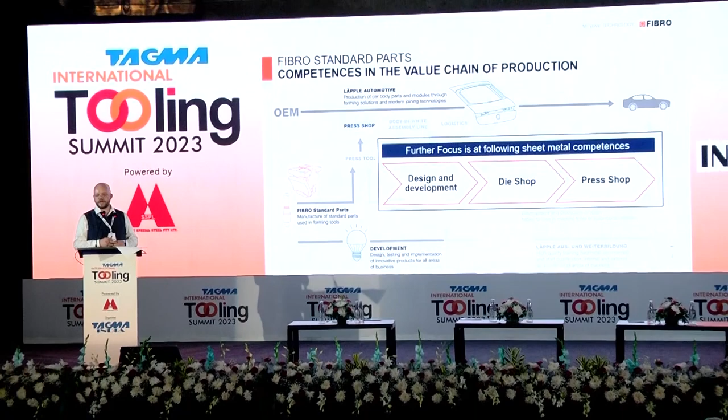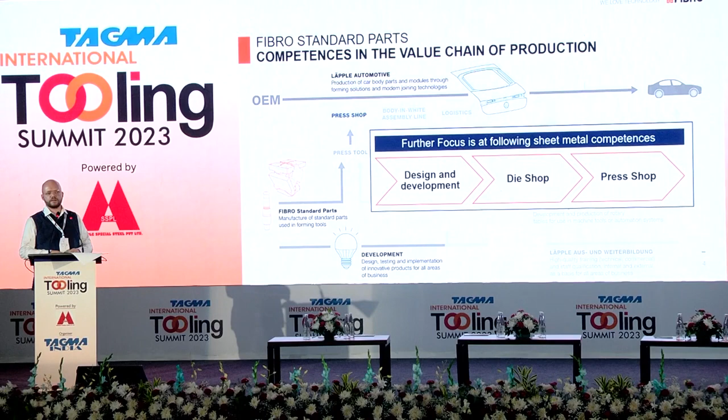So, let's start. In the next minutes we will focus on these 3 steps: design and development, die shop, and press shop. We will take a look how the development in our group, combined with the standard parts division, can support the tool and die shop, furthermore the press shop, and then support to get your return on invest on maximum strokes per minute and maximum production running time.

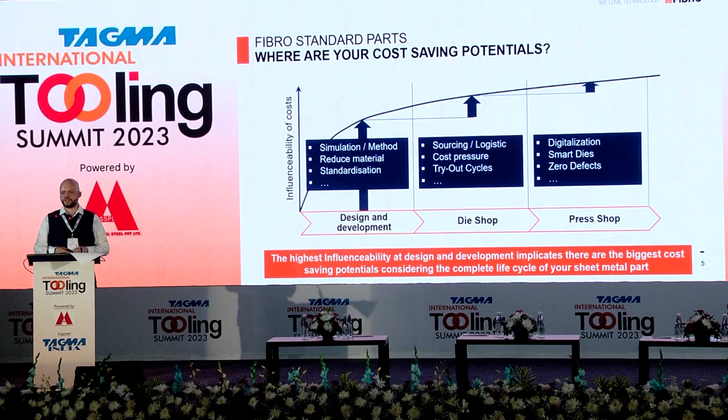At the beginning, I told something about efficiency. So what is efficiency? Efficiency is the ratio between the effort you put in, so the costs, to the outcome. And with this value, we measure how economic a situation is. On this slide, we see at which process step we have the most influenceability in regards of the costs. And it is, as it always was, during design and development phase.

With the arrows going from the bottom to the top, the length of the arrow symbolizes the influenceability of the cost. So you see in the press shop, where actually you have to return your invest from all the steps before, you have very small influenceability of the costs. Everything has to run as it was planned before, otherwise you're losing money. Later on, I will show you some small little helpers, some hidden champions in regards how you can improve zero defect production in your press shop.

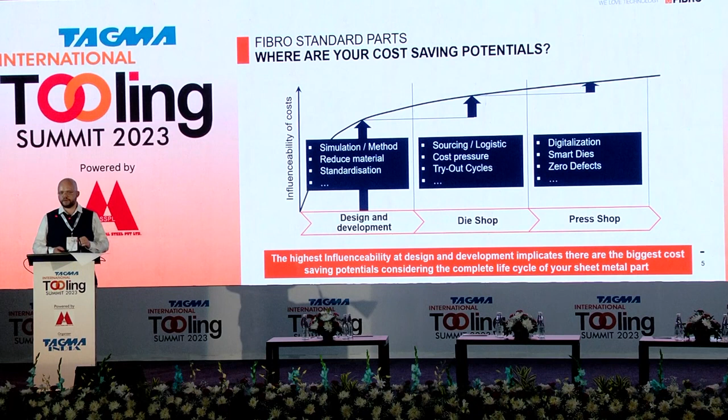But first things first, now I would like to show you from the beginning how with simulation or method, state-of-the-art issues, you can influence your value stream, your production. I have a big example where I would like to tell you a personal story and afterwards something about reducing material.

So I went to China for the company in 2018. And during that time, we had several challenges also due to COVID virus. In the middle of 2020, I was coming back from China, and I was exhausted. Everything was very unplannable. Supply chain was absolutely catastrophic. And then I read in the news something about giga dies.

And I read that now there is a technology on the market where before you have to produce around 70 single parts, and now with one stroke you have this part, talking about aluminum die casting. So what does this mean for standard part business? What does this mean for our customers, for die shops and everything? So we see here a very, very disruptive technology. So we have to take care about it.

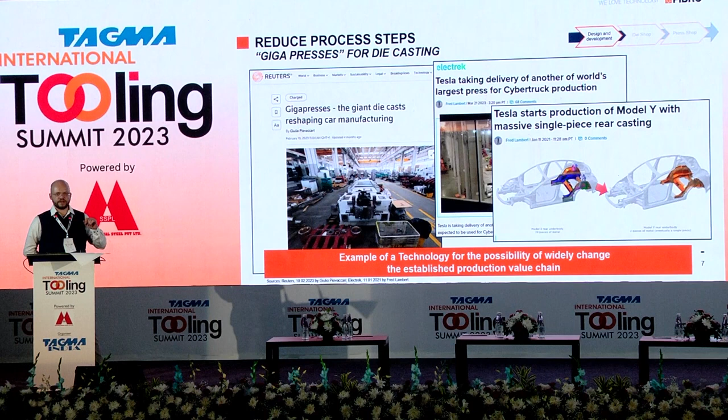And I called my friend working at Läpple Automotive, Dr. Martin Heckmann, and told him the story, how do you see this. He's a very good friend, sparring partner also in standard parts development for me. So after some small talk, he introduced something to me where we also reduced the amount of dies in the process of creating a sheet metal part. And I was telling him, Martin, my good friend, please don't develop technology where you reduce the amount of dies, because then we will make less business with standard parts.

And bottom line is, now we know how we can participate, how we can support each other in regards of concepts where you reduce the amount of dies in a disruptive way. We see here a development project where we were able to reduce, especially for spare part business. So when your press shop is not under full production, you just need some spare parts. Here we have a solution. Just use one die, one single stroke.

The setup time in your presses is very small compared to that. You can use smaller presses. And compared to the casting technology, you can use it with your existing technology. You don't have to invest. So you can directly implement that in your value stream.

So should I speak louder? Pardon for that. Thank you for the feedback from the audience.

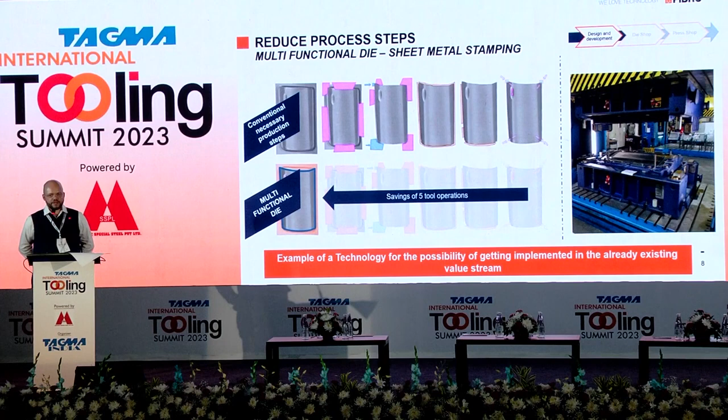I would personally call it the king of standard parts, which means it's also the biggest standard part, which consumes the most space. So when we come to progressive dies, or also big line dies, when we have space issues, a CAM unit is not always a CAM unit. There are CAM units on the market.

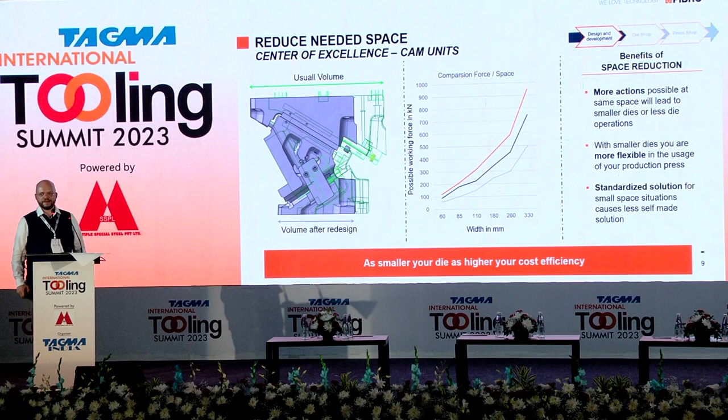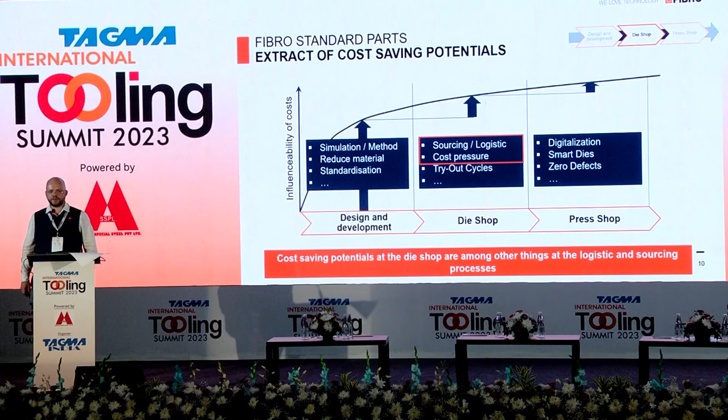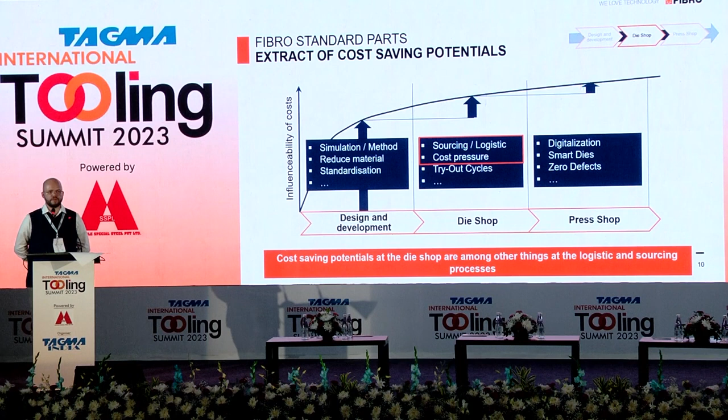Let's come to the second chapter. We go to the die shop. One of the most critical issues in regards of die shops, also according to my personal experience, is tryout cycles. For sure you have your project plan, for sure you work with some buffers so that you are able to finish all the dies, but the tryout cycles are the most critical point. So let's take a look at all the process steps we need to fulfill before the tryout cycle, like sourcing, logistics, and for sure also a main issue in die making is cost pressure.

Here we have an example from Germany where we developed together with a Bavarian global OEM a commissioning service. We had some workshops, and the question was how we can help you to improve your incoming goods, quality, checking your marking and everything. And we developed a service where we were able to fulfill all the different active parts, all the standard parts, in combination with customer-specific parts, so all the parts where normally we need CAD data, let's say, the cutting knives or some other bending steels.

We were able to fulfill in a partnership way that the customer gets his individual logistic box already with sorted parts. We already have marked them. We do quality control for him, and the logistic box just goes into the die shop. No part is missing, it goes directly to the workbench, and the people can immediately start to assemble the die. So before, when there was a problem, the customer had to call 6 different phone numbers, and now only calls 1 phone number, and this person is responsible for everything.

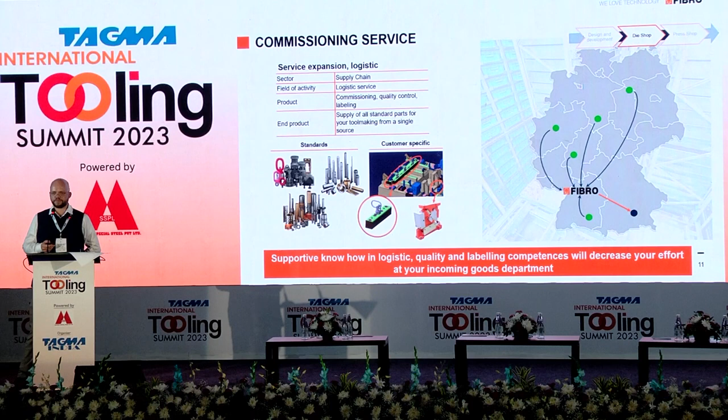Let's take a look at the second part. When it comes to standard parts, welcome to the world of standard parts, where every individual customer has their own standard. To fulfill all this need in a global way, we have to track 40,000 different article codes. For an individual customer, standard parts are for sure deducted. And during COVID, I made an analysis that an average side panel die has around 400 different article codes. In our product range, no matter which standard you have, there is a high chance that with our broad product portfolio, we can handle it.

When it comes to global supply chain, what's also important for you as a die maker, when it comes to starting at the right time with your tryout cycles, is that you have the same support that you have where you're based in your local area, for example in India. You need a partner which is also in the countries where you supply your dies. This is also very important for your die making when it comes to tracking the project, solving the problem when the problem comes up, and starting at the right time with your tryout cycles.

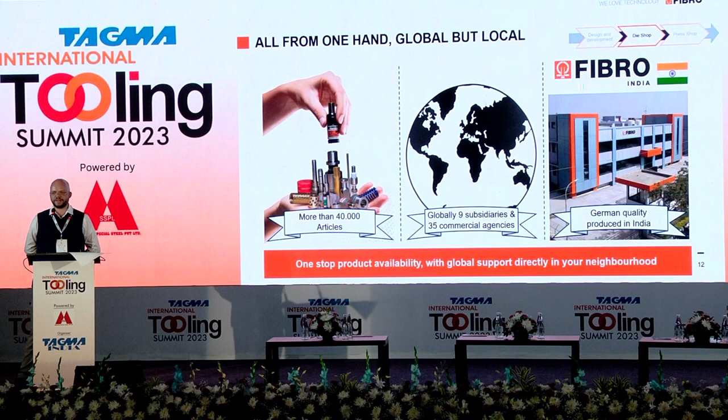Let's come to the last chapter. Let's go to the press shop. Let's come to a chapter where you have the least influence on costs. There everything has to run as planned, 24/7, maximum strokes per production. You want to be able to put the dies into your press line as the production planning department has planned it. Otherwise you lose money, you waste money.

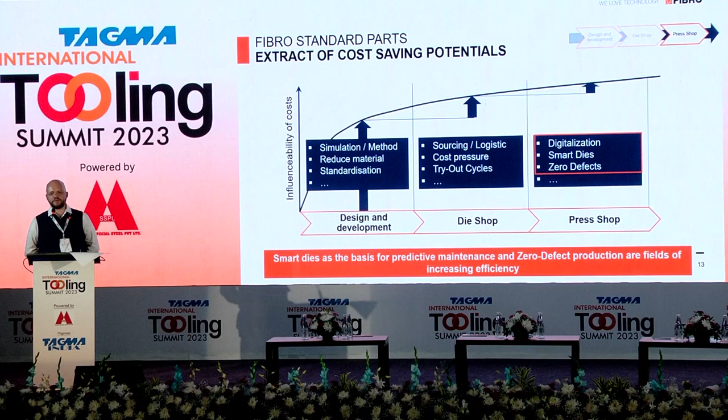And therefore, in the last chapter, I have two big points for you. I have some inspirations for you in regards to digitalization. About 4 weeks ago, FIBRO India got the certification from the government for the WPM sensor technology to import it into the country. So we are now safe in regards to all the certifications, and we can start with that. Let's imagine the die will speak with you in regards to gas spring leakage and stuff like that. And at the end, one of my favorite points, smart little helpers. The best solution is a small solution.

Coming to the point of digitalization. Here we see a gas spring. When the cam unit is the king of the standard parts, the gas spring is your queen. According to my personal experience, this is also one of the most critical parts. It's filled with gas, with 150 bar pure nitrogen. So you have something like a pressure device, like a gas bottle.

When you have leakage here, when the gas is flowing out of the gas spring, you get wrinkles in your sheet metal. So the task of this product is that you have the correct force, the correct drawing force or bending force or holding force, in the correct area of your die, so that mostly your drawing processes are as stable as possible.

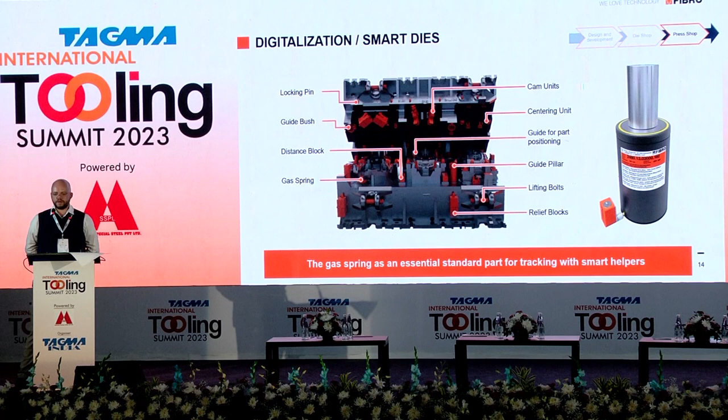Let me introduce to you a sensor technology which is able to track the status of the queen of the standard parts, the gas spring. We see here in the left corner the die where the gas spring is mounted. The sensors are directly mounted on the gas spring and they communicate either with a gateway, which can directly influence your press line, or with a software where your maintenance engineers and your production planning can see the status of the gas spring, and it could also communicate, as you wish, with a cloud to store all that data.

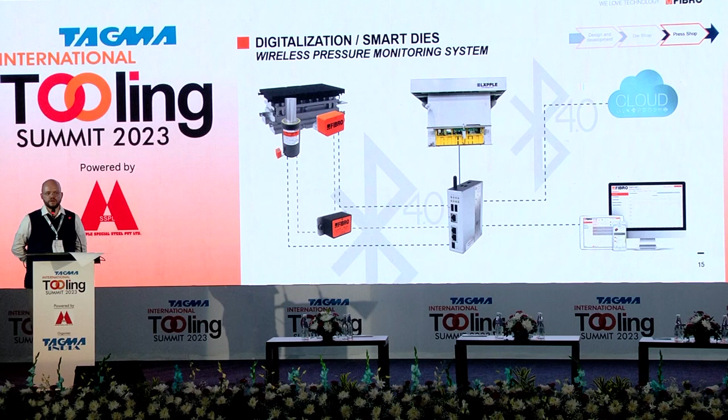We are tracking heat and pressure. So what's your value in tracking heat and pressure? For example, your production planning department decides, now I have to produce this part. Then imagine you were able to just check on the laptop or in the software: are the gas springs in this die okay? Can I run the production? Okay, I'm at green value, so you can go directly into production and don't lose time through potential waste of setup time, which doesn't make sense.

You are also able to check...

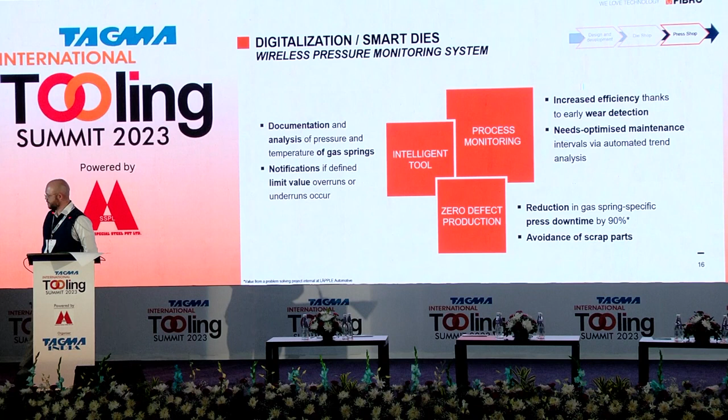Is time up? I don't think so. So I keep on moving? Okay, sorry. 5 minutes? Thank you for that. Okay.

Digitalization, press shop. Also a very convenient way how you can use this technology is with your smartphone. Your smartphone is everywhere with you. Going to lunch break, going to toilet, you have your smartphone with you, right? So imagine the die is sending you an email or a pop-up window that this die is not able to go to production due to pressure value, which is not able to fulfill the needs in production.

Or when we combine the cloud with the software, we can also look into the future. Based on a mathematical algorithm, the system learns from the past, which means what is the pressure decrease, what is the natural leakage of the system, and then it tells you in 3 months or in 2 months you have to make maintenance, fill up the gas springs or whatever.

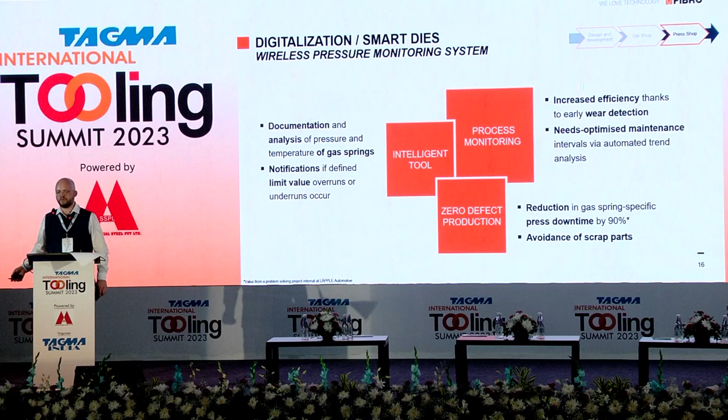Now we come to my favorite part of the presentation, smart little helpers. As smart as the solution is, as efficient the solution is. And if one of those two pictures on the left and on the right of the die in the middle are familiar to you, I absolutely know your pain and your struggle in the press shop. On the left side, we see a broken blank holder screw M16, and when it comes to transfer presses, or you increase the strokes per minute, we have more stress at these screws.

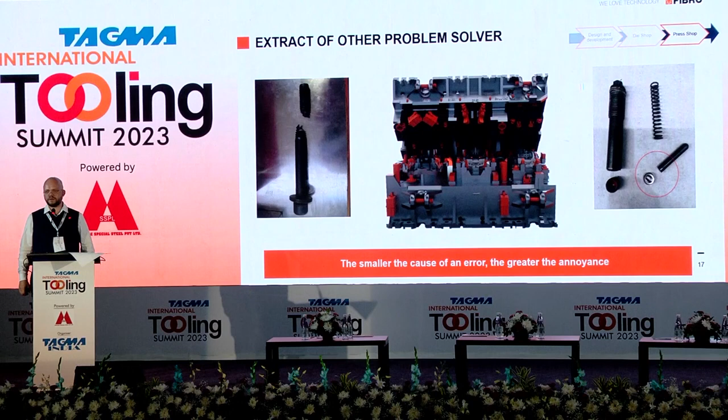They break, fall into your die, they destroy something, and the worst case is that it destroys your drawing contour, your shape, and then back to maintenance, welding it up, working it in, try-out, and then again. And on the right side, even worse, it's a 6mm pin from a spring plunger, which also breaks and falls into your die. And I would like to inspire you with some solutions.

And when it comes to breaking spring plunger bolts, there are also other technologies on the market. The basic version is a 55 HRC hardened pin, so it will make damage. You will see it in the area, and we have a solution here with a highly sophisticated plastic pin. The plastic pin contains something like graphite inside, so you have a greasing function, and the bolt breaking issues are no problem for the press shop anymore.

And the best thing is you also can interchange it with existing dies, because we are fulfilling the global standards for this product. M16 with the right pitch and with the length, the force and the stroke length and everything.

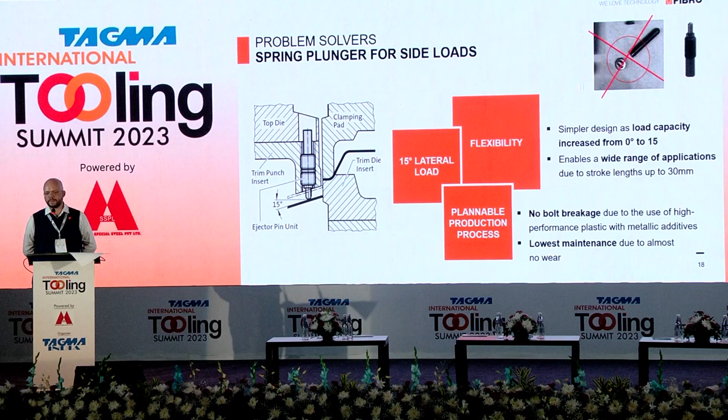When it comes to breaking blank holder screws, there was the time many years before when the conventional press technology switched to transfer dies. And there we faced, together with a big press manufacturer: I want to sell my presses, but the customers ask me, will your press destroy my die, or will your press destroy the standard parts which are in the die? I cannot sell the presses if I don't have an answer for that. So during those days, we developed a damping technology.

We see here on the left side the blank holder screw with this orange material in between as a washer. And let me demonstrate shortly the difference from the traditional solution. Normally we use a polyurethane spring. Polyurethane is developed as a spring material. So a spring is getting energy inside, getting energy outside. Now we have the damping version, a material especially developed not for damping whatever, no, it's developed for damping steel on steel products in press shop environment.

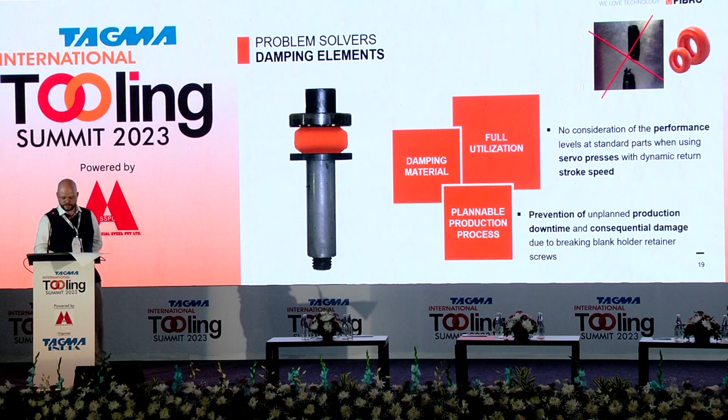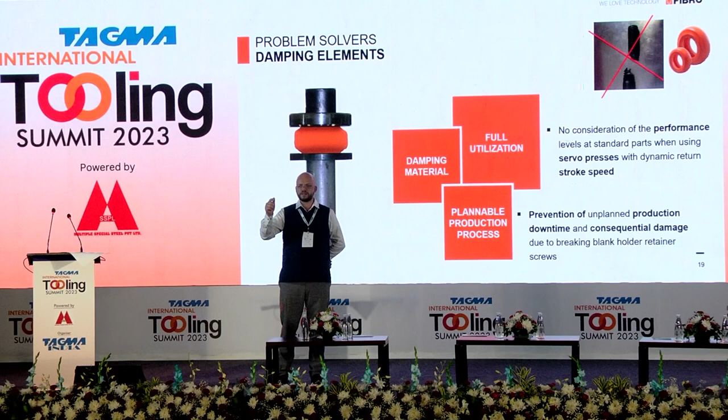And maybe the people in the back cannot see, but for the audience in the front, I have here two different materials. Spring version, spring material, energy inside, energy outside, and this, the damping, energy inside converted to heat.

Coming to the end of the presentation, second last slide. What have we seen? Let's summarize. We have seen several approaches in regards of how, in die design phase, you can have influence. What are the latest trends? What challenges are we facing in the future? We talked about design. We talked about tool and die manufacturing, try-out cycles. According to my personal opinion, this is the most critical point, the least influenceable point.

And then in the press shop, one of the most important things, there is a return of investment. There you have to run your dies. So you have to consider 24-hour production, highest strokes per minute as possible, all in the areas before.